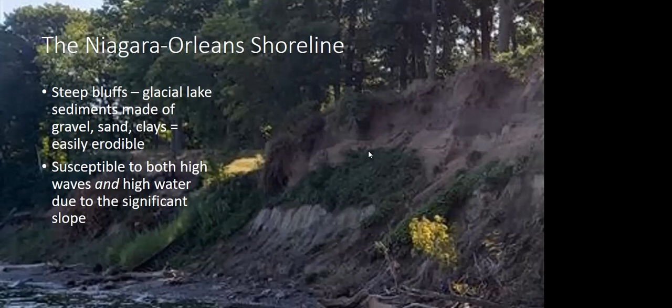And most of that is bluffs. So the Niagara Orleans shoreline is heavily bluffed. That's very steep, very tall banks, mostly made of glacial lake sediments. I don't want to get too much into this because there's not a whole lot of us that really care about what's there, but it is very important for what is actually going on the lakeshore, why the erosion is the way that it is in certain cases.

And that's not just because of high lake levels, but it's also because they form these steep bluffs, and that's also susceptible to rainfall, sheet flow coming off the bluffs, and a bunch of other little nuanced parts of living on the lake and the lakeshore processes. So these bluffs are susceptible to both high water and wave events, and sometimes both at the same time.

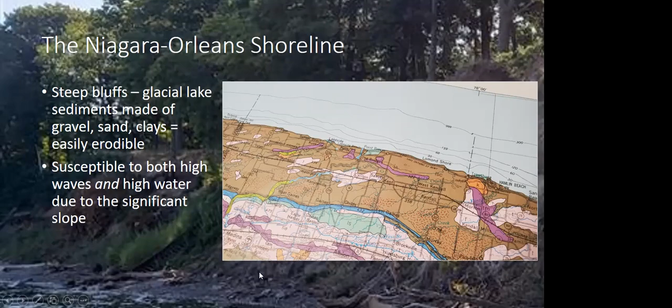Some mechanics of bluff erosion, and we're going to have some more resources coming out on bluff erosion from New York Sea Grant in the coming months, probably next summer. So you'll have more opportunities to learn more about how bluffs erode. But most of it is because of the wave action on the lakes, and it comes in and it cuts away at the bottom. This causes slumps and slides. So we end up seeing a lot of very rapid erosion in these bluff environments rather than slower day-to-day type erosion that we see in cobble and sandy beaches.

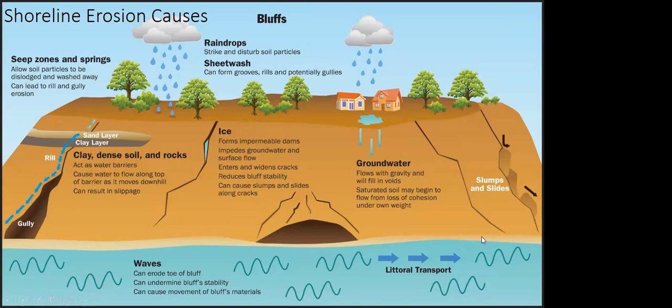We also have to consider a lot of other factors besides the waves, and that includes the rain that's falling on top of the bluffs and how that interacts with the bluff once it permeates through and into the sand layers, meets a clay layer, can't go past the clay layer, so it moves out to the surface and causes more weight and more easily erodible material on the bluff face itself. I don't love this diagram a lot. I promise I'll come out with a newer one that's a little bit more intuitive in the future.

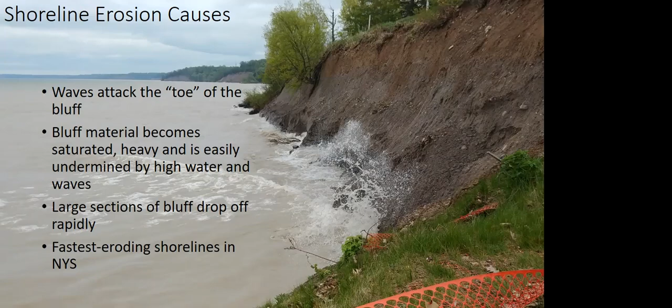For those of you that live in these situations, you may have noticed that there are sometimes cracks along the top of the surface. That's a good geologic way of knowing that you are dealing with an active slope, so a heavily eroding, quickly eroding slope. That release of pressure cracking can often be a sign that you have a slope that is moving towards the lake a little bit.

So how do we address that? Well, one, there's no good one-size-fits-all technique for shoreline protection. We really do look at this on a case-by-case basis. There are hard options that include revetments such as rock riprap, poured concrete seawalls, and sheet pilings made of steel or wood. But there are also softer options that include drainage improvements, surface water capture, terracing of the slopes. That means just reducing the slope, making it a little bit flatter, but also using strategic vegetation.

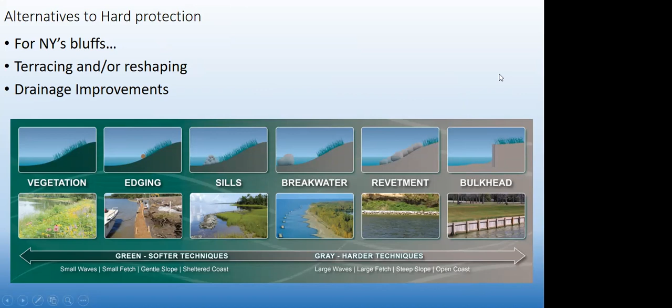But why does it matter? Why do we care about these green or different newer type technologies? We're really looking at the functionality of the coastal processes and the ecological nearshore processes. And it's been well over 100 years where we've poured a lot of concrete and rocks on the shoreline, and that's really been to the detriment of replenishing the nearshore.

And when I say nearshore, that's kind of like the beach area where you're going to be wading, swimming, and so on. That area usually should be sandy. The waves during storm events should pick up that sand, bring it to the shoreline, and make it a more equal or more even transition from lake to land. We're missing that right now, and a lot of that is because we've simply put way too much human interaction on the shoreline, and in turn that's kind of led to almost total habitat loss in some areas for shoreline critters and plants.

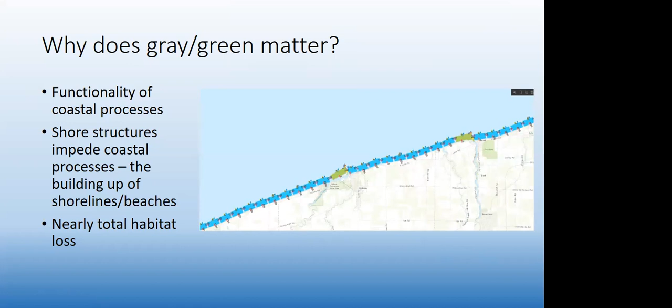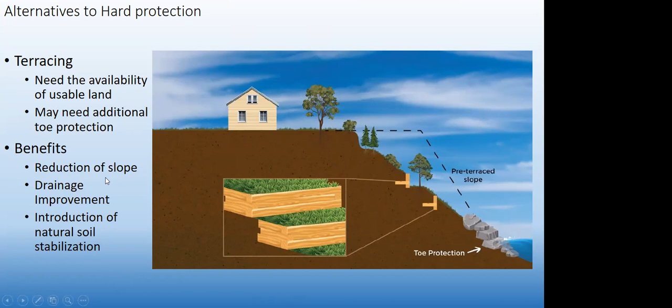You might need some shoreline toe protection just to make sure these are extra stabilized. That's something for you to figure out with contractors and DEC during the permitting process. But for the most part, you can use this terracing option to reduce the slope, revegetate the slope, and make that vegetation a lot more stable because it's not growing on such a steep slope and it's not as susceptible to rainfall events. And that leads to more soil stabilization. And in a lot of cases, you still maintain a view because what you're planting is down below.

But when you are considering these shoreline options, you want to make sure that there's a community approach being taken. One, because it's organized, it's going to help you in your permitting process, that you have people working together, and that speaks strongly towards wanting to do the right thing. It's a way to combine resources. We know a lot of these construction projects tend to be extremely expensive, but also it creates this non-combative way of building up the shoreline.

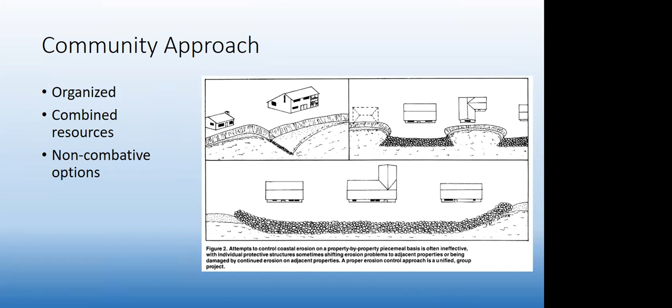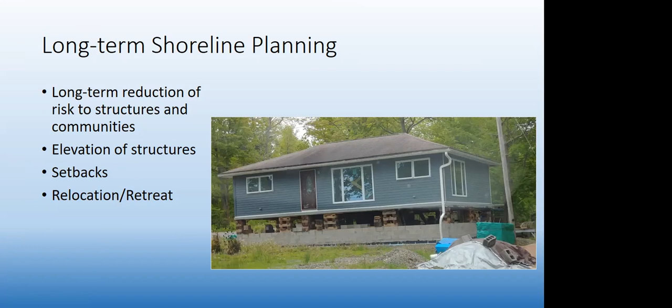Other things you could do would be relocation of buildings. So this is a newer building. If you're going to build by the shoreline, don't build anywhere close to the shoreline because you just don't know how much it's going to erode in 10, 15, 20, 50 years down the road. And for the municipal folks that have joined today, there are ways to work this into your zoning and setbacks, your local codes that can make your communities more resilient to future shoreline change. And if we're talking about 20, 30 years down the road, relocation, retreat sometimes is something we do need to talk about because there's just no options left for some shoreline properties.

So where do we get started? Well, one thing we do want you to do is to thoroughly evaluate your situation beforehand before just cramming a quick and dirty permit through the mail slot at DEC. We want you to work with your neighbors, get started early, talk to multiple contractors, talk to DEC, talk to New York Sea Grant, because we are here to help and we are here to answer questions, especially myself. This is my job, to help folks like you on the call today make better decisions, to map out your path towards stabilizing your properties or preparing your properties to be more resilient in the future.

We do want to put some warnings in here to not get experimental, because I've seen some wacky stuff in my time with New York Sea Grant on the shoreline, especially Lake Ontario and Lake Erie.

Anywhere from crane operated weights or blocks of cement that are placed on the shoreline to be removed at a later date that tend to kind of stick around forever, all the way to riprap installed completely wrong, 90 degrees instead of nice and flat within the lake bed, and just making things a whole lot worse.

So we want to make sure that you are not getting experimental, that you are following those DEC, DOS, and Army Corps permitting processes, and that you're also looking much farther into the future, not just, we had one storm, we had a little erosion, let's blow the shoreline up and pour concrete all over everything. Let's try to think about this in a long-term way.

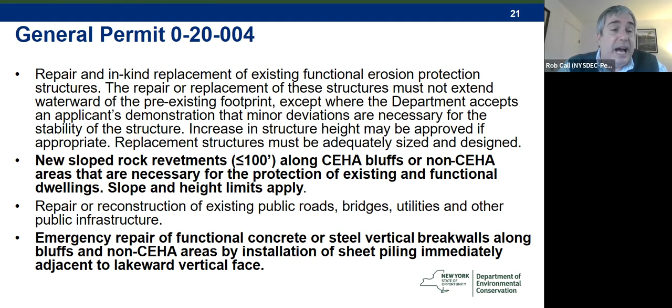And also the emergency repair of functional concrete or steel vertical break walls by the installation of sheet piling immediately adjacent to the vertical face. So if someone has a vertical structure like a concrete break wall, one thing that we can authorize is driving sheet pile directly in front of it as a quick fix. And this is also pretty common, especially in the embayments. So for the next slide.

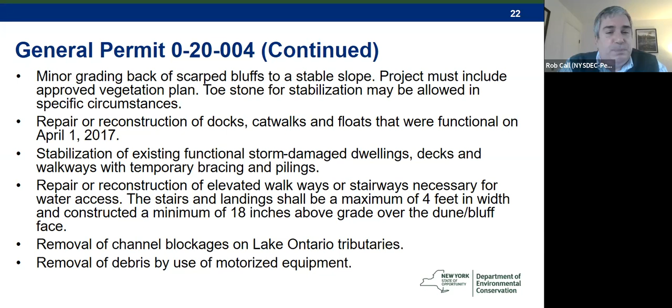So yeah, the other potential opportunities within the general permit include the minor grading back of slopes and bluffs, the repair or reconstruction of docks, stabilization of existing storm damaged dwellings, decks, and walkways, the reconstruction of elevated walkways or stairways for water access, removal of channel blockages on Lake Ontario tributaries, or Lake Erie tributaries for that matter, and removal of debris by motorized equipment. So if any of your projects is one of these, it's great. We can work with you to get a general permit. So next slide.

To apply, essentially, you really need to reach out to your regional DEC office. So for Orleans County, that's Region 8, or for Niagara County, that's Region 9. And the things that we'll immediately need would be a completed general permit application, and we'll be glad to send you a copy of it. It's also available online. Application, some current photos showing what the problem is along the shoreline, and some project plans.

And related to the plans is typically both a site plan, which is a top view map drawing, as well as a cross section showing what you have in mind. If the project meets the general permit criteria, there is no need to send the application to the U.S. Army Corps of Engineers or the DOS.

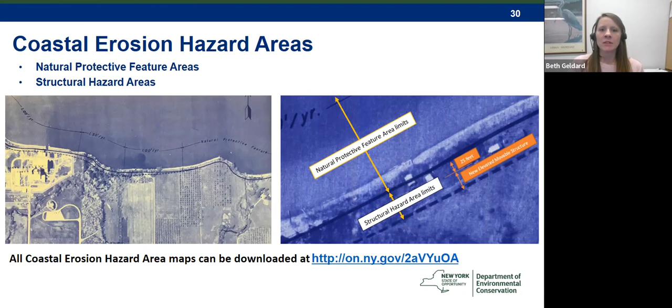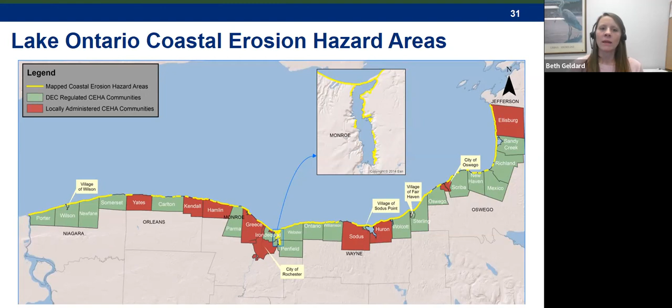So if you're located in the town of Kendall or Yates, a coastal erosion management permit would be issued by your town. Keep in mind that even though a coastal erosion management permit would be required from your town, it's likely other DEC permits would be required if you're working near the water or if you're in a state regulated wetland. Next slide, please.

Okay, so now I'm going to go over a list of items that you would need to supply to DEC when applying for a permit. So the first thing we look for in an application is really project justification and if the activity meets our permit issuance standards. So really describing the erosion rates that are taking place and the location of at-risk structures are very helpful for our review.

We also need to know that all the alternatives to the activity were evaluated and considered. So for erosion protection structures, since they typically cause adverse impacts to coastal processes in adjacent areas, we really don't want to see those used unless all other options aren't achievable. So again, that's your no action alternative, moving at-risk structures landward, and our nature-based alternatives such as planting vegetation, rebuilding dunes, and so forth.

We're also looking to ensure your project won't likely cause a measurable increase in erosion to adjacent areas. So limiting lakeward encroachment of new structures is typically required, as well as making sure structures are properly tied into adjacent structures and shoreline areas.

Other general things that should be included are an aerial map, so we know where the project is located, a stamped and signed survey, so it's clear where the property boundaries are, and recent photos of the project site and adjacent areas where the project will tie into. Next slide, please.

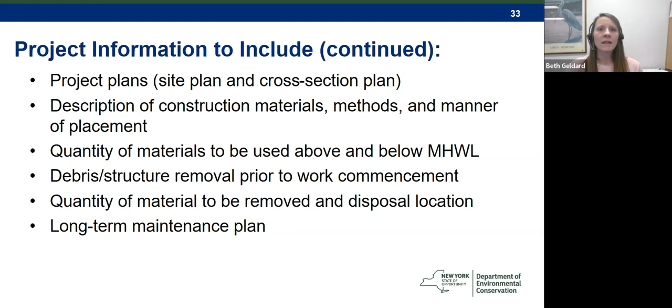Next slide, please. Okay, so this is an example of a site plan and the general details that are required. So as you can see, you have your existing conditions, your property boundaries, the location of existing adjacent shoreline structures, location of your existing house, and then where your structure will be in comparison to that.

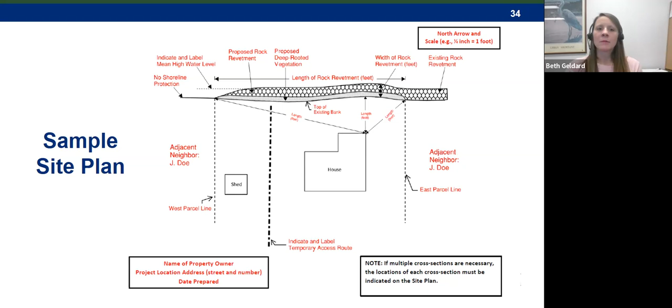Next slide, please. And this is an example of a cross-section and the details that would be required. So really outlining the existing conditions, where the existing slope is and how that compares to your proposed structure. And, of course, measurements: we need the height and length measurements of the revetment, any bank regrading or planting areas, how the toe would be anchored and embedded into the shoreline, size for the stone, the slope for the revetment, your drainage details,

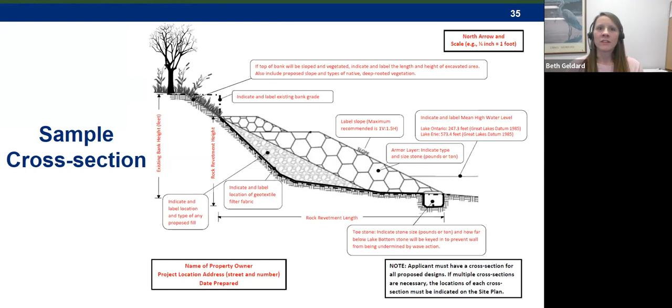and of course, identifying the property details, so the property name and location is helpful just to keep the file organized. Next slide, please.

So given the lot depths, if they're adequate enough, moving the structure away from the eroding edge is really the best solution because it provides the best long-term resiliency and saves on costs in the future for having to maintain a shoreline protection structure. If the structure could not be moved landward for whatever reason, potentially due to lot size, or if there's other restrictions on the lot that would prevent you from doing that, then this is when you would need to apply for a shoreline protection structure. Next slide, please.

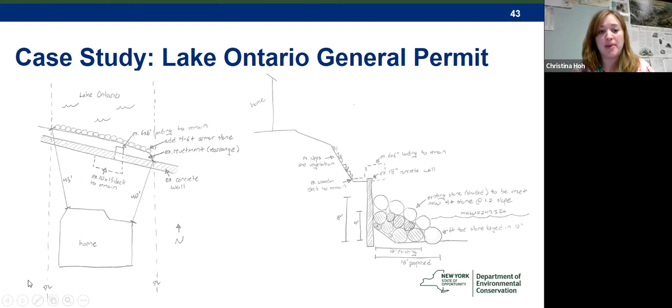Okay, so I was able to fit these onto one slide. So on the left, again, we have a top view plan. And again, you've got the property lines, the location of the main structure, the home, and those benchmark measurements, in this case, to either end of the proposed revetment. The concrete wall was not changing, and so that could just sort of be there as kind of another benchmark, as well as the deck.

So structures that are existing and aren't being changed, those should also be called out on the plans, just because then we might go over for an inspection and say, whoa, is this a new dock or a deck or something? We didn't know anything about this. And that could raise a few questions. So that's just something that you want to make sure you include if they already do exist.

The stairs essentially were no longer existing by this point, so they're not included, and they were not going to be replaced in this case. I'll talk about that in a minute too. The rest that's on the top view plan include the area of the existing revetment, the added layer of 4 to 6 ton armor stone. And so that's pretty much all that we needed on that particular top view plan.

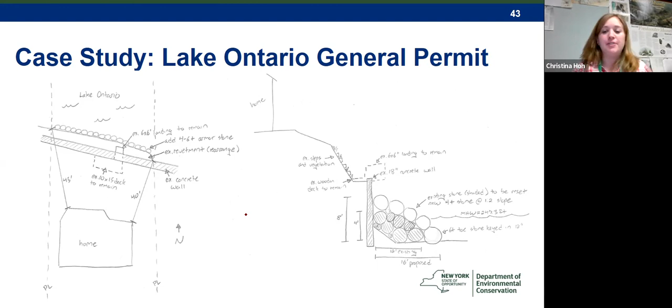And so just to kind of summarize a little bit, general permits are used for relatively low impact projects that use acceptable methods that have, again, minimal impacts on areas where we have jurisdiction. Not all projects are going to fit under the general permit, but it was written to cover sort of the most common lakeshore projects and ones that we've seen a lot of, and we know that they're going to last. Contractors tend to know how to do them pretty well.

But even though they're pretty straightforward, we still do need those details in the plans. A lot of permits come past us, and so we really need to know the story of what's going on at your property. And we're a very busy office, but we are definitely willing to help you work through this process, whatever sort of permit you might be looking for.

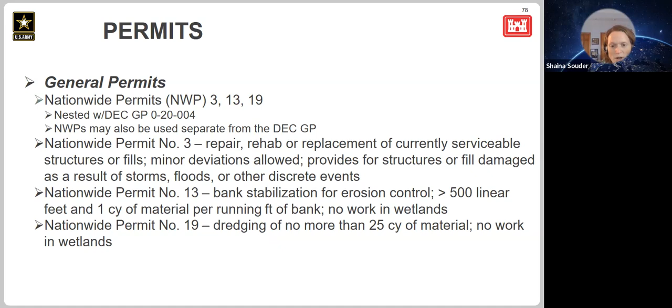Nationwide permit 19 is for minor dredging projects, less than 25 cubic yards of material. No work in wetlands is allowed under that one either. And if you're planning to use that permit, you need to have an upland disposal location. None of the dredge material can go into another water of the United States. Next slide, please.

Okay, so for those 3 permits that I just mentioned, nationwide 3, 13, and 19, if you are applying and get affirmed a DEC general permit 0-20-004 from DEC, then you do not need to contact the Corps except in certain circumstances. These are listed on the slide below and on our website also. Certain areas have endangered species listed, and one of the things that we need to make sure is that we are coordinating appropriately for those things.

So if you're proposing projects in one of these circumstances below, then you would need to contact our office and DOS. But as Matt said, if you are affirmed under the GP listed above, you do not need to contact the Corps or DOS unless it's one of these other circumstances. Tree removal in all towns in Jefferson County, activities in federally regulated wetlands in the towns of Huron and

Wolcott, Wayne County, activities in federally regulated wetlands in Cayuga and Oswego counties, activities within sandy shorelines in the towns of Sandy Creek and Richland, Oswego County, activities within federally regulated wetlands or sandy shorelines in the towns of Henderson and Ellisburg, Jefferson County, and projects that involve the placement of stone below the mean high water line in excess of an average of 1 cubic yard per running foot of shoreline.